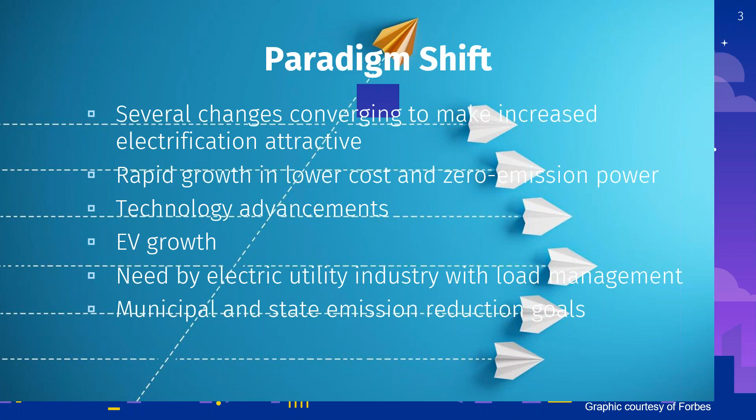And then also over the last 10 years, municipal and state emission reduction goals have changed. There weren't many cities that had climate goals 10 years ago, but many have implemented climate goals and policy since then. And even over the last 4 years, it's accelerated even more, where city and county policies have gone into play. So it's shifted. Now it's a good time for electrification.

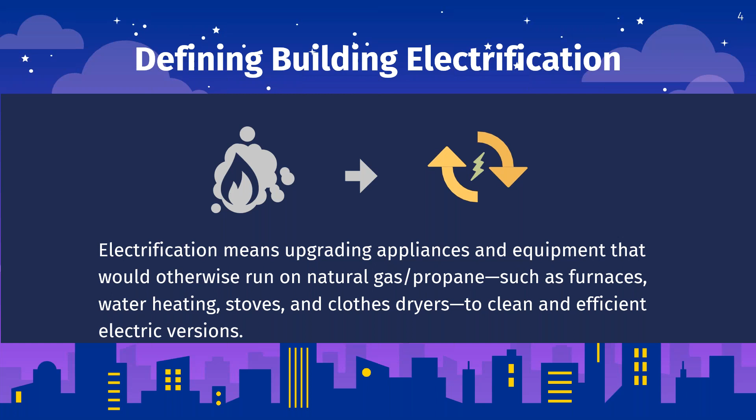And so let's just define building electrification. It's just moving or upgrading, if it was an existing building, equipment that would otherwise run on natural gas or propane to clean and efficient electric versions. And we say efficient too because we don't want to go from a gas forced air furnace to electric baseboard heat, which is not efficient. So we want to move to efficient electric appliances. And so air source heat pumps are one, which Matt will be talking about, and heat pump water heaters, which Christine will be talking about.

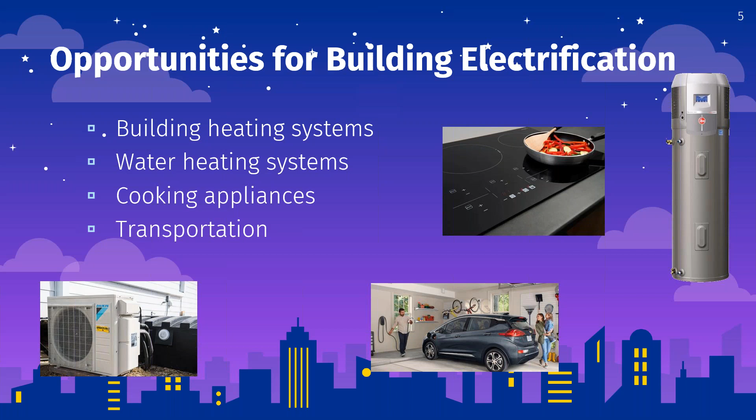So our opportunities for building electrification, these are some of the areas that's happening. Cooking, clothes drying, those are other areas to also move to electrification. But we're just going to focus on, from a building perspective, the heating piece and the water heating piece.

We already know heat pumps have been operating for many years effectively and efficiently in hot climates. But today, technology is there where these systems can operate in colder climates. And a lot of the Southwest, as I showed earlier, the SWEEP region is in cold climates.

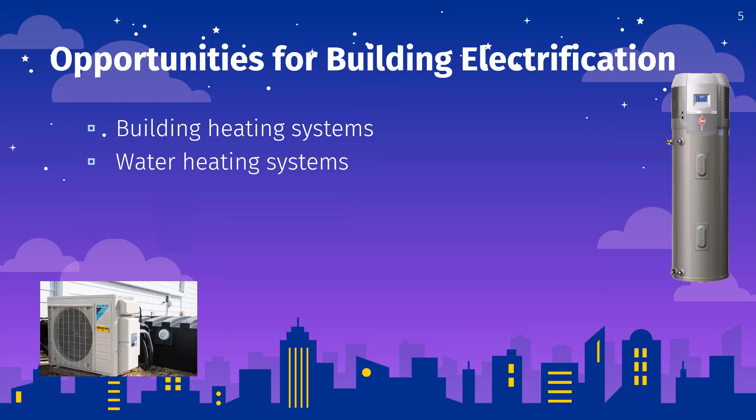So we wrote a report, and it's available. You can look for it on the handouts. You go over to your dashboard in GoToMeeting, and you'll see 4 downloadable handouts, or you can go to the SWEEP website, swenergy.org, and download it.

What we had is a number of communities asking us questions of how they can move forward with building electrification, how they could advance policies, ordinances, and their building codes to require building electrification, commercial and residential buildings. So we looked at, across the country, cities that had implemented some policies and what they did. And then we also looked at opportunities of how we could support municipalities in our region.

And so we included code adoptable language in this report. So feel free to download that. What we found was 6 approaches to electrification. And so one is incentives. So you say, I'm a city or I'm a county and we're going through this COVID right now. It's a challenge. Funds are a challenge. Well, there's different types of incentives, but one is expedited permitting, expedited field inspections that can incentivize a builder to move towards electrification.

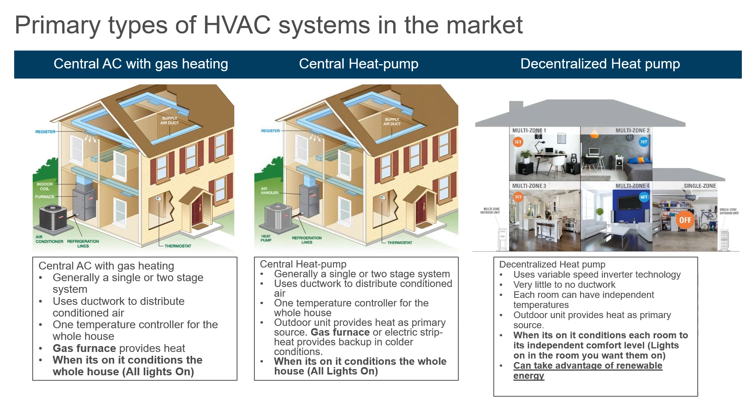And then this is just a really quick understanding of what inverter versus non-inverter is. A non-inverter system is basically all on when it's on. An inverter system will ramp up to meet its desired need. Kind of works like the accelerator does in your car. If you only want to go 45 miles an hour, you only have to go 45 miles an hour. You push down as hard as you need, and you go that speed.

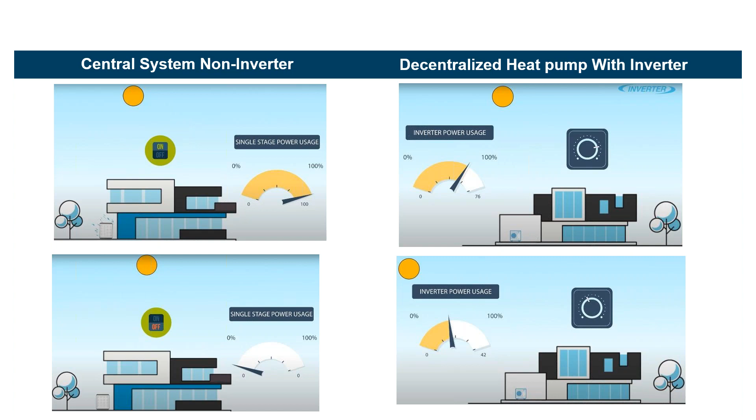With a single stage system, it's all on or all off. That's it. And you can see in the off state, an inverter system will ramp down. So it slows down. It doesn't have to turn off as it meets room temperature. And if anybody has any questions about this, we can discuss it later, but this is just a basic overview of inverter versus non-inverter.

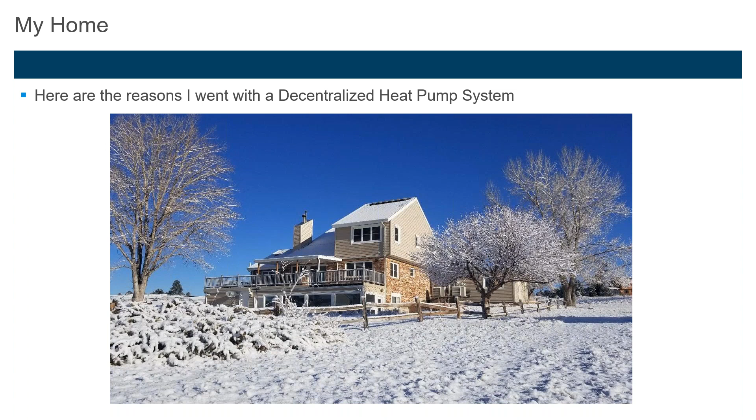Okay, so now let's dive into my house. And here are the reasons why I went with a decentralized heat pump system. So as you can see here, this is Parker, Colorado. It does snow here. It gets into the single digits in the wintertime. It's a beautiful place to live. And one of the reasons I chose a decentralized heat pump system is if you look at the outdoor unit, there's a space-saving option. The outdoor unit can be mounted just about anywhere you want because it has such a small footprint and a small clearance requirement.

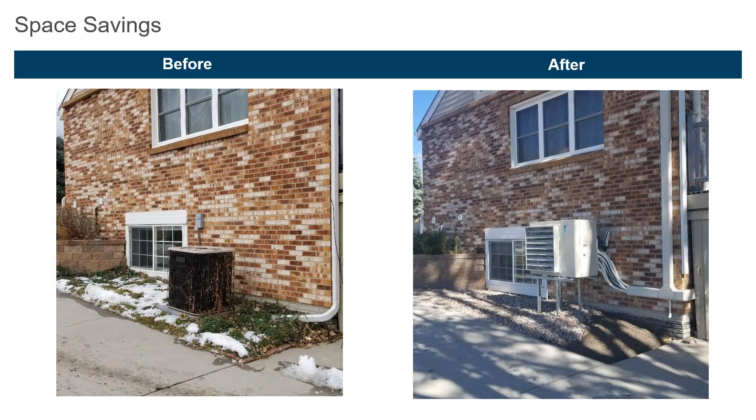So you can see on here the before and after. There was my central AC system. It was probably 30 years old, wasn't working, so we had to replace it. And we opted to go for this decentralized heat pump system, which turned into a much cleaner installation on the outdoor. And then on the inside, it really allowed us a flexibility of design in remodeling our basement.

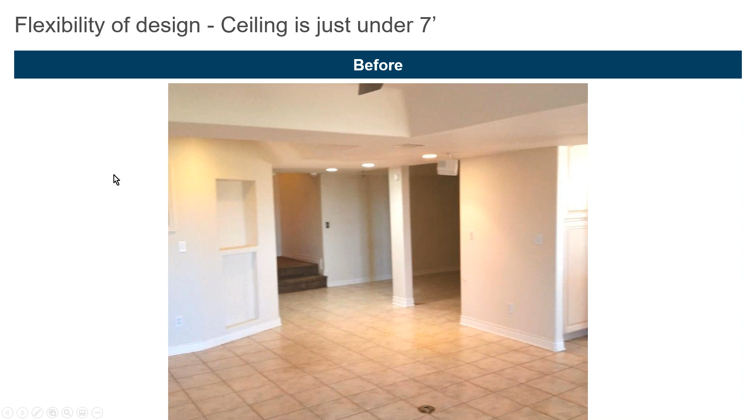So this is a picture of our basement, and the ceilings were just under 7 feet tall. So I think they're about 6'10". I'm 6 foot tall, so I could easily walk in the basement, stick my hand up and touch the ceiling, and it just felt like you were kind of cramped and like you were in a basement. And the reason why the ceilings were so low is because there was all this ductwork in the ceiling.

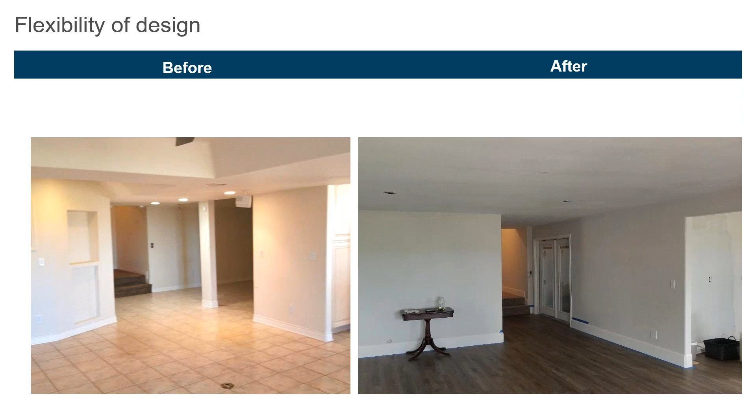And because we went with a decentralized heat pump system, we didn't need this ductwork any longer. So we were able to raise the ceiling up to 8 feet, which really now represented a living area that we were proud of. You walk into the basement, it doesn't feel like a basement anymore. And here's just a side-by-side of a before and after. And we did some other things, obviously, so we closed off a room and put a door in. But it really does make this feel like just another level of the house versus a basement.

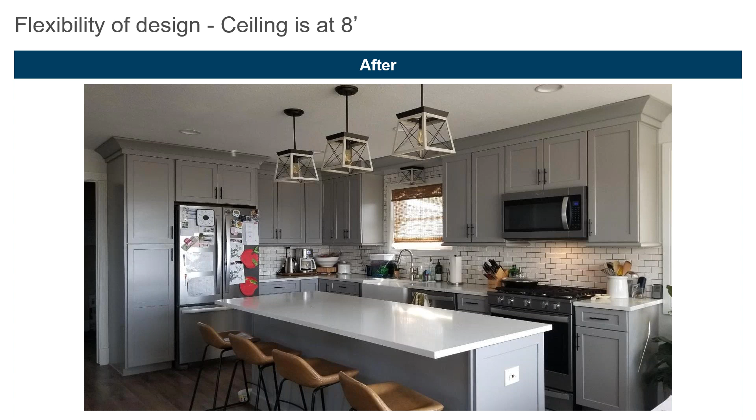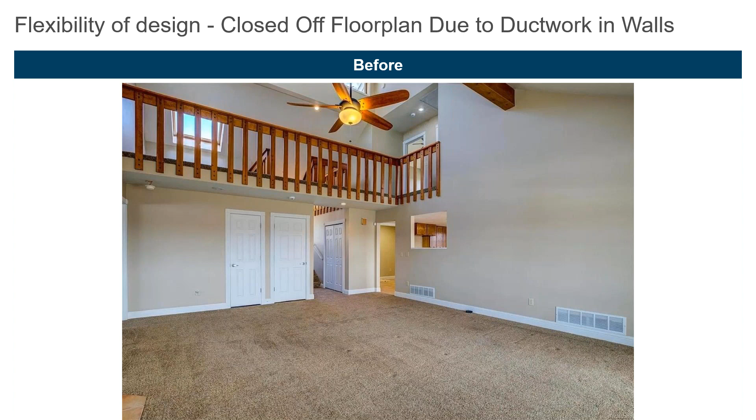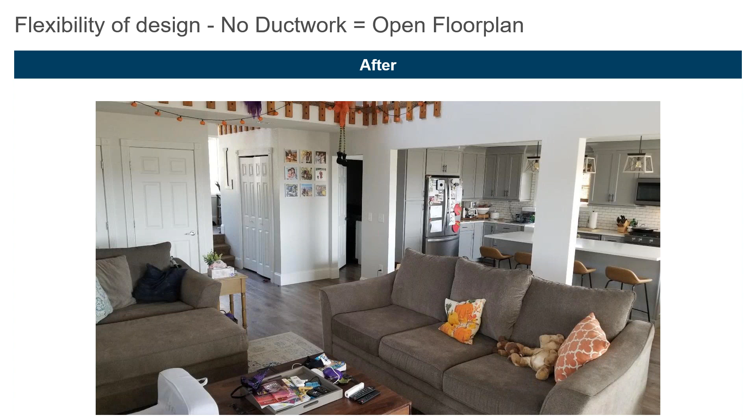And then same thing here with the flexible design. We had ductwork in the walls, so we had 2 returns there, and you can see through that little cubby hole, that was the old kitchen. And once again, we didn't need this ductwork, so we were able to open up the floor plan and really allow for a nice area where we felt like we weren't constricted in the living room or constricted in the kitchen. It really flows nicely through the house now.

And that was all through eliminating that ductwork that was really dirty and leaked a lot. And in fact, on the picture on the left-hand side, the before, you can see that there's bedrooms above the kitchen. Those bedrooms never got any air. They were always either hot or cold. The old system just was not satisfying the zones up there at all.

My wife was opposed to this system initially because she was afraid of having something on the wall. She thought it was going to look unattractive. But the payoff or the benefits that she now reaps are better than what she thought it was going to be. And what I mean by that is, for example, we sleep in a cold room at night. We love to be cold at night when we sleep. We get under the blankets and stay nice and warm.

But when we wake up in the morning, in our old houses, we'd go sit on the couch, and we'd have to get all bundled up because it was cold, because we had to have a cold house because we had a cold bedroom, and the old system only had one temperature. But in this scenario, we have this system that conditions our living room come on about 4 o'clock in the morning, and it heats up that living room to 72 degrees.

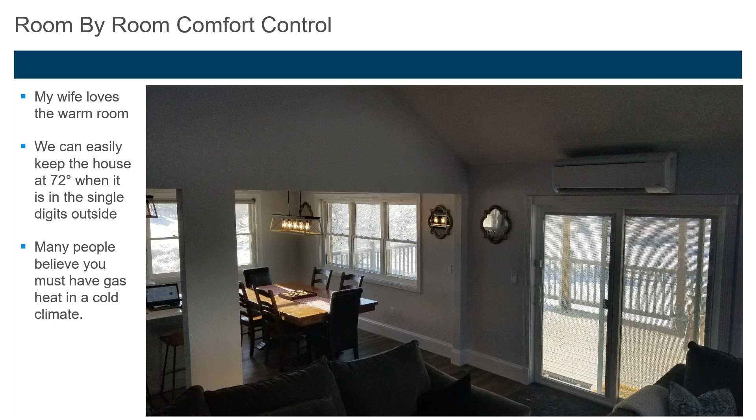So just to wrap this up in a summary, a decentralized heat pump system allows for me as a homeowner to get more property back due to the small outdoor unit. I can mount that outdoor unit just about anywhere I want. I can mount it up high off the wall. It doesn't have to sit on the ground. There's lots of flexibility on the mounting of that outdoor unit. It's much quieter inside and out.

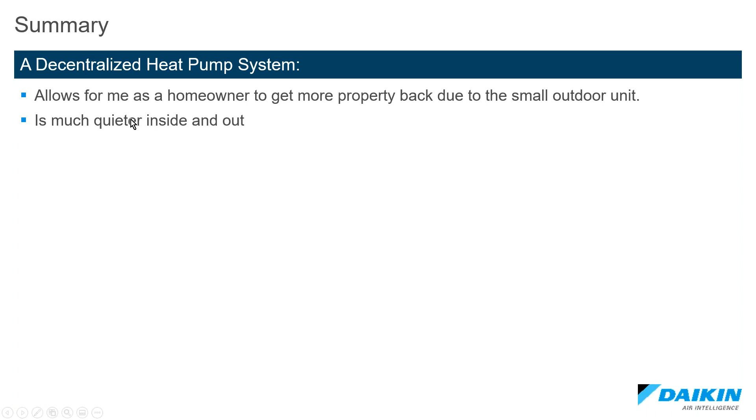In Colorado, we have a lot of radon gas, and I have a radon mitigation system. And if you stand outside next to my outdoor unit, you hear the radon mitigation system before you hear the outdoor unit running. That's how quiet it is. The radon fan is actually louder than the outdoor unit. And then a decentralized heat pump system eliminates the need for all that ductwork. So it allows for me to have those tall ceilings in a retrofit or new construction application. And then it allows a lot of flexibility with floor plans.

I imagine that if in the 80s when my house was built, if these decentralized systems were available, my house probably would have been designed with a decentralized system back then, just due to the way it was laid out. A decentralized heat pump system provides relief from my electric bill. They're much more efficient than a traditional system. And the year-long cost is much lower than owning a traditional system.

And there was a comment about the upfront cost, so I would definitely like to address that. And yes, there is traditionally a higher upfront cost on a decentralized system than there is with a unitary system. And that's really right now due to economy, right? This decentralized heat pump system is not mainstream. Daikin has been manufacturing these systems for 50 years, and of course in Europe this is what's used.

Asia, this is the normal thing that's used, but in the United States it's not. So we're working to make this more mainstream, and it is the future of HVAC. But the more it becomes mainstream, the lower the costs become. It also lowers the cost due to the fact that contractors get more familiar with it. If you look at examples in the Northwest, contractors up there are generally much more familiar with how to install these systems, so the upfront cost is much lower.

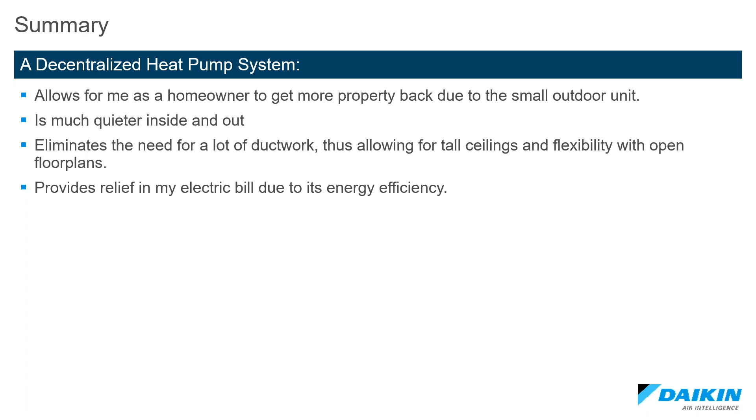But in parts here of the Southwest, some contractors really have no idea how to bid these jobs or install these jobs, so they bid really high, and then sometimes they win, and it's really the consumer who ends up paying for it. And that's one of the things that I'm working on at Daikin. I know SWEEP's working on, and many other people throughout this industry are working on the education process. And we have many classes on how to educate people on installing these systems properly, so it does lower that upfront cost.

And then a decentralized heat pump system prevents me from needing supplemental gas heat. It lowers my carbon footprint, which is very important to me. It can provide a higher level of comfort, which my wife absolutely loves, and it's better for the environment because it doesn't produce carbon dioxide. And what I mean by higher level of comfort, that's that room by room control.

Generally, people think they're making one sacrifice. Well, if I go to an electric heat pump system, all I'm really going to do is be better for the environment, or be able to take advantage of renewable energies. But there's many, many positive trade-offs when you go to a decentralized heat pump system. And I think I've explained some of those in my presentation. A decentralized heat pump system also represents the future of HVAC. Like I said earlier, in Europe, this is the primary product that's sold, these decentralized heat pump systems. They typically don't use ductwork because they understand the inefficiency of using ductwork.

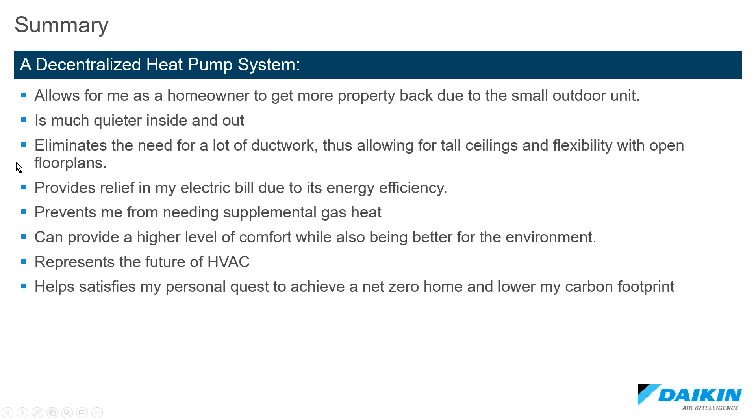And then last but not least, a decentralized heat pump system helps me satisfy my personal quest to achieve a net zero home and lower my carbon footprint. And that's a true statement. In the very near future, I hope to get solar panels put on. I'm just kind of waiting to see what happens in the next few years with policy to determine if there's going to be some higher rebates or not. Solar is very expensive, but that is obviously one way we can help get these renewable energy sources into the market, is by incentivizing consumers to go ahead and make these choices with some type of a rebate.

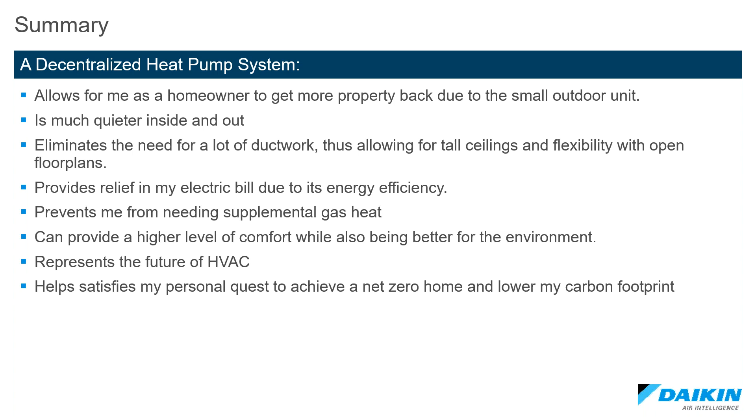Okay, and that wraps up my presentation. So I'd like to end on any questions. Great, Christine, you might have a couple, and I've got one here. Want to jump in first? Yeah, a good question came in that I think everyone might want to hear the answer to.

What's the difference between a heat pump and a mini split? Are those the same thing? So yes, mini split is just a bad marketing term, I guess you can say. It is a heat pump. Typically in the market, a mini split means something on the wall. That's what people think generally, or something small. But the reality of it is that term mini split is just bad marketing. That product category is what I have on my home. By product category, it is a mini split, but I've satisfied my whole house with what we call in the industry a mini split.

That's just a bad marketing term. What it really is, is a decentralized heat pump system. That's really what a mini split is. So it's very similar to a traditional unitary heat pump system in technology, but it's much more advanced in technology, which is why the decentralized heat pump systems don't need supplemental heat.

Okay, Matt, I have another question here. Robbie is aware of the Daikin systems in Europe, and he is wondering if and when Daikin will be bringing their combined HVAC domestic hot water heat pump system to the U.S. market? Oh, I love that question. So the Daikin Altherma, which is what he's referring to, is an amazing system. And it really is just beyond revolutionary. We actually had it in the United States a couple years back. It was ahead of its time here in North America. Didn't get adopted as well as it should have back then.